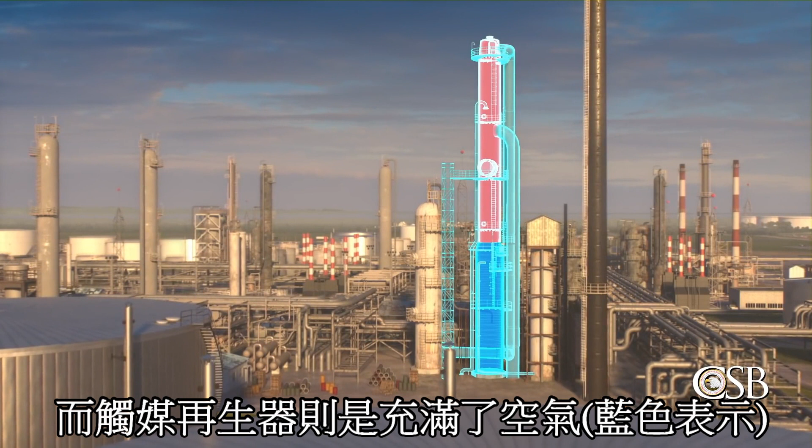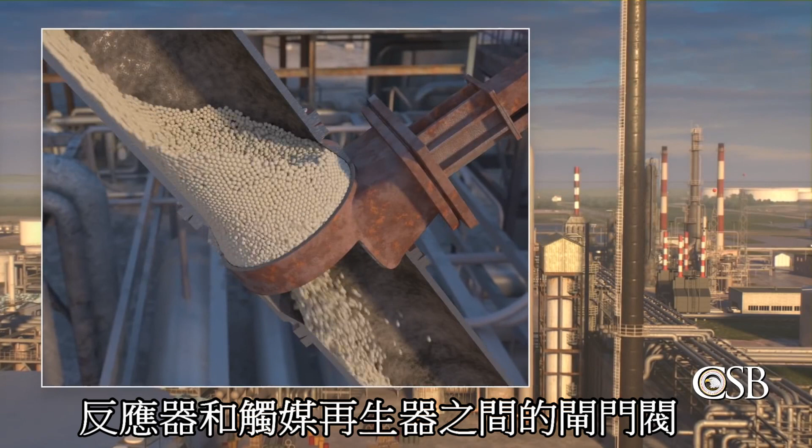Slide valves control the flow of catalyst between a reactor, which contains flammable hydrocarbons, and a regenerator, which contains air. It is important to prevent mixing the hydrocarbons and air, since if they mix, a dangerous explosion can occur. To avoid this hazard, the slide valves maintain a catalyst level between the reactor and regenerator, which acts as a barrier. To initiate the shutdown of the FCC unit, refinery workers stopped the flow of hydrocarbons to the unit and closed the two slide valves connecting the reactor to the regenerator.

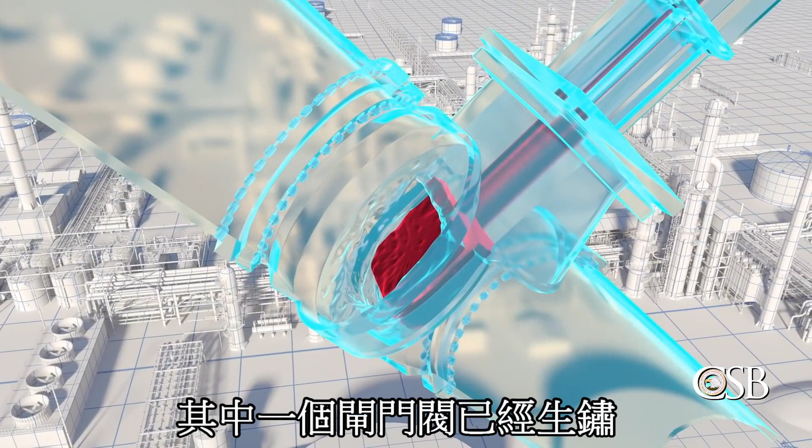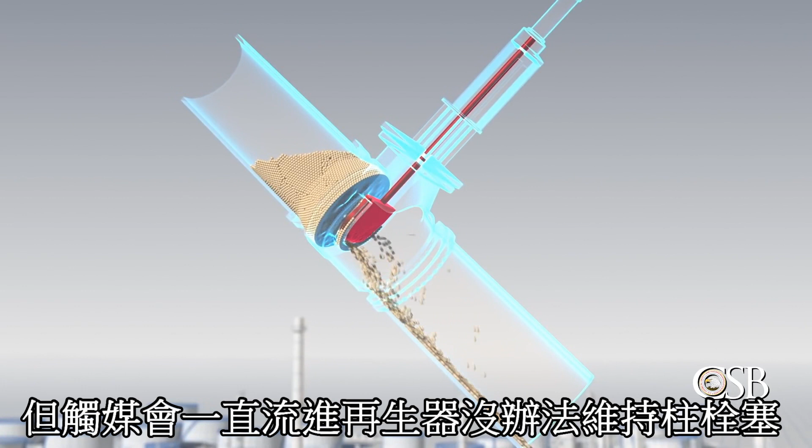But unknown to the workers, one of those slide valves was eroded, and even though it closed, it could not maintain a catalyst barrier in the reactor. As a result, the catalyst from the reactor fell through the valve to the regenerator, leaving no protective barrier between the two pieces of equipment. This allowed air from the regenerator to flow backwards through the slide valve into the reactor, and then into equipment downstream of the reactor, which contained hydrocarbons, forming a flammable mixture.

At approximately 10 a.m., the hazardous mixture of air and hydrocarbons found an ignition source, and there was a large explosion.

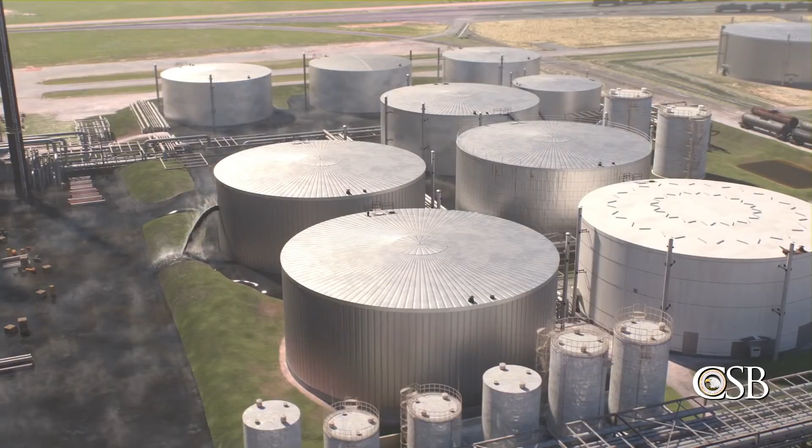Debris from the explosion flew about 200 feet and hit a large above-ground storage tank, puncturing the side of the tank and releasing hot asphalt. Asphalt poured out of the tank over the containment berm and into the refinery's operating units, where it spread along the ground. At around 12:15 p.m., the released asphalt ignited near the storage tanks, and a fire broke out.

The fire traveled along a stream of asphalt to the refinery's crude and FCC units. The fire produced a huge plume of black smoke, leading to the evacuation of a portion of the town of Superior. Typically, this type of asphalt fire can burn for days.

A plan to extinguish the fire was developed by the refinery's emergency response team. Around 3 o'clock, they began to address the asphalt fire together with the Superior Fire Department. A fire truck drove to the edge of the crude unit, and emergency responders sprayed dry chemical fire extinguisher inside to fight the fires that had broken out there. Responders also used two stationary hoses called monitors to shoot water into the crude unit in an attempt to extinguish the flames.

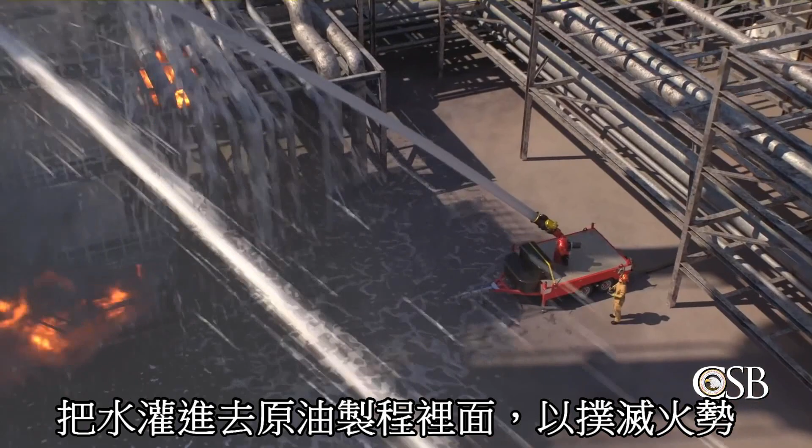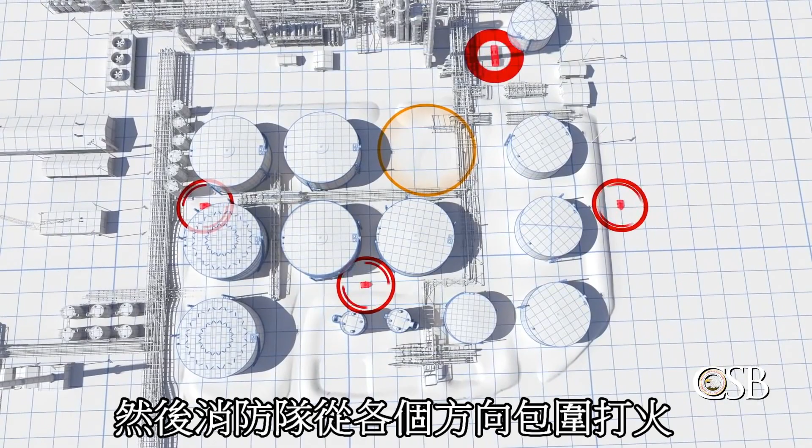While these fires were being put out, over by the storage tanks, emergency responders began to approach the large area of burning asphalt. The emergency responders' plan was to push the asphalt fire into an empty area near the storage tanks, and then aggressively attack the fire from multiple directions.

First, they used two monitors, one to the north and another to the west, to sweep water to push the asphalt fire toward the designated containment area. Then, when the fires within the refinery's units had been extinguished, the fire truck relocated so that it could spray the burning asphalt in the containment area with foam from the east.

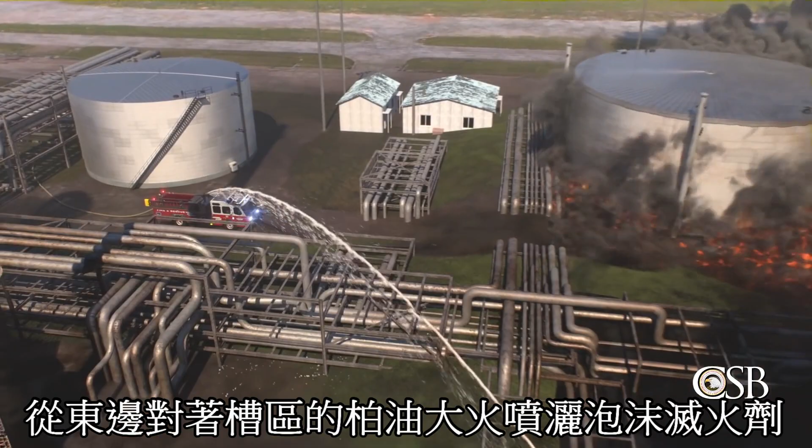Around 5:30, an additional team began to attack the fire from the east, spraying foam from a monitor. At this point, the asphalt fire was completely surrounded within the containment area. With the fire contained, emergency responders were able to put out the asphalt fire at around 7 p.m.

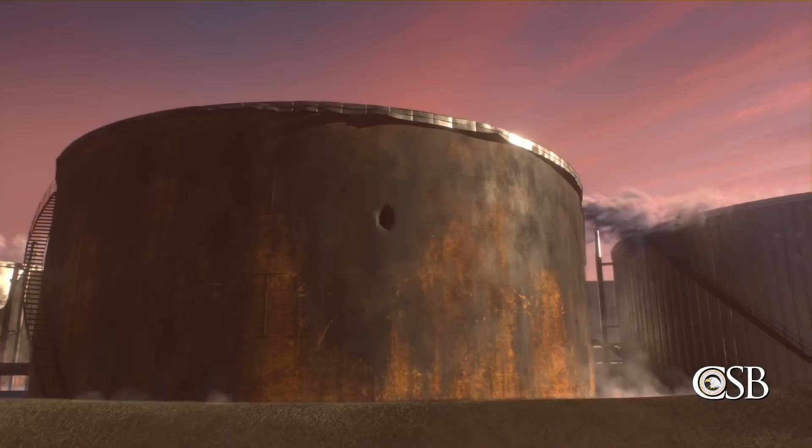The asphalt fire had been extinguished in a matter of hours, as opposed to days, as had been initially feared. The evacuation order was lifted, and Superior residents were allowed to return home. Nevertheless, 36 Husky employees and contract workers sought medical attention for injuries.